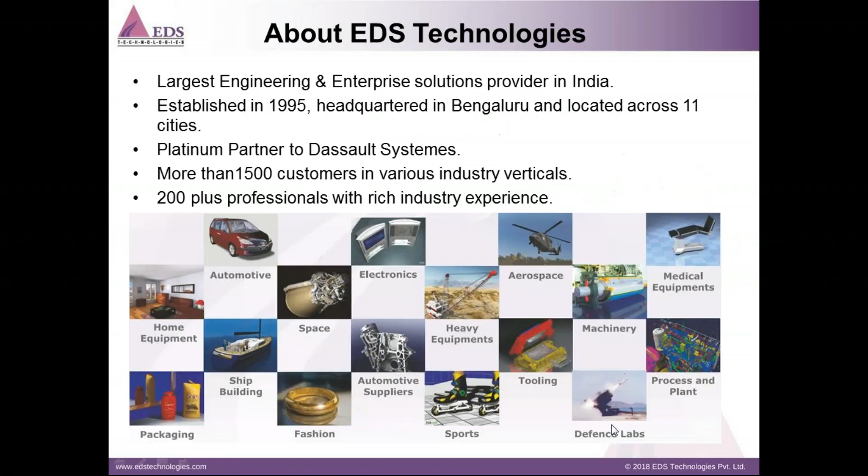Thank you, Ajay, and thank you all for joining this webinar on Simulation Powers Sustainable Innovation. In today's market, it's a brand dedicated to making realistic simulation an integral business practice: explore, discover, understand, improve. These are some of the buzzwords we hear in order to sustain in the competitive market, and to bring our product to the next assembly level or to the market. This helps us increase profit by reducing man-hours, machine-hours, method, time, and money. So in this session, let us understand the different tools available from Dassault Systemes to help our product design and development in a much faster and effective way.

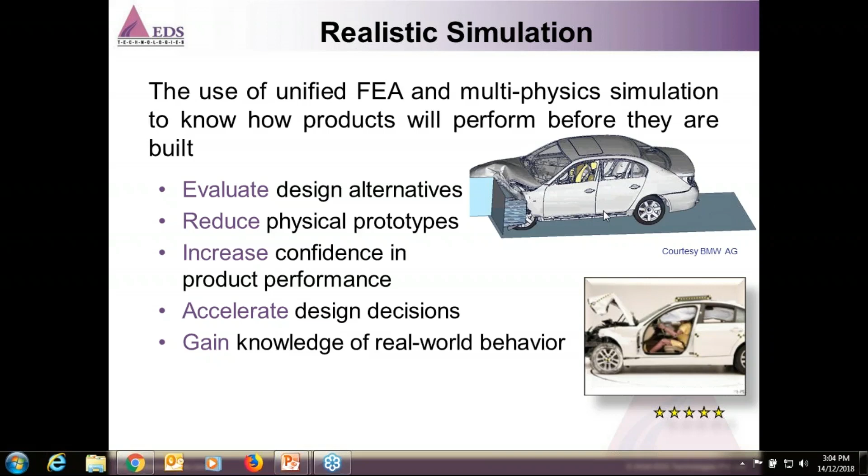Here you have an image showing physical testing, along with the real-time experimental image showing simulation on the right-hand side, and the practical testing image on the left-hand side, which will provide a similar result. So instead of putting your energy, money, and information into testing right from the first time, you can depend on realistic simulation to get the result.

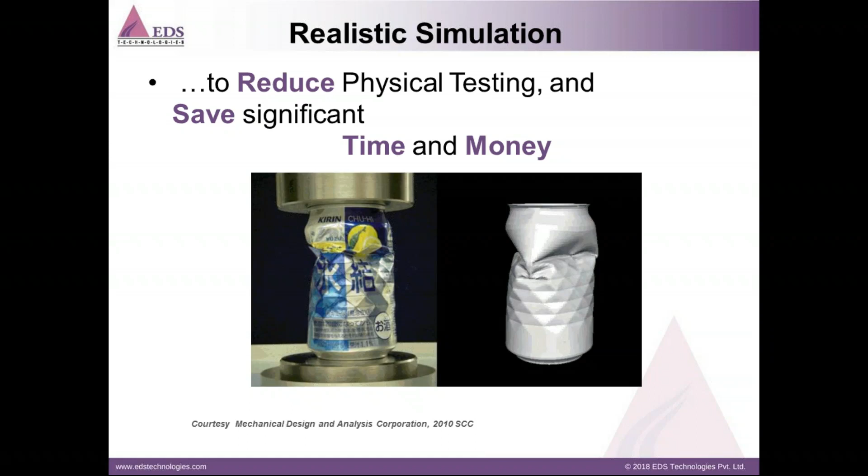So when we understand the SIMULIA product, Dassault Systemes has come out with 4 different products that we are going to understand today. One is for Unified FEA, the second for topology and other optimization, another for parametric optimization, and the fourth for fatigue and durability analysis. Similarly, it helps us with ease of use, complementary technology access, flexibility, scalability, openness, manageability, IT benefits, collaboration, and automation using these tools, which is also called the power of portfolio business values.

When we discuss Unified FEA, topology optimization, and other tools, there are tool names that are more prominent and used, tested by industry leaders, with results correlated to experimental results. Today I'm going to explain Abaqus Unified FEA, Isight, which is process automation and design optimization, Tosca, which is non-parametric optimization, and fe-safe for fatigue and durability analysis.

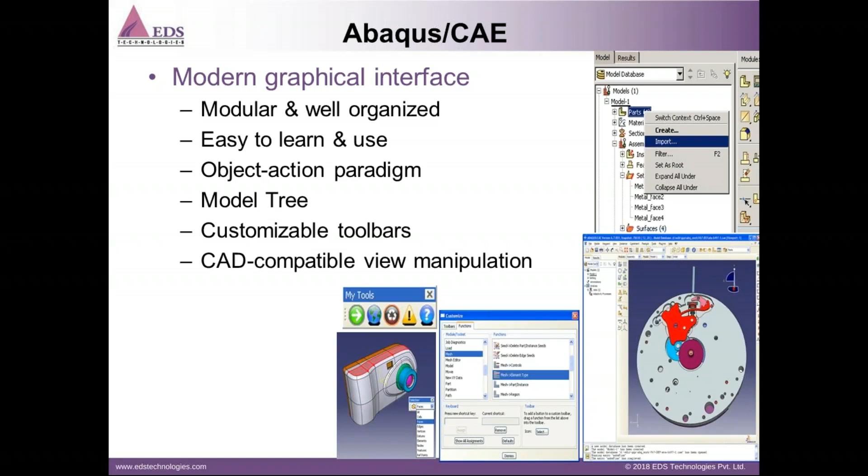Let's understand this particular tool, Abaqus Unified FEA. This model is having CAE, which is called Complete Abaqus Environment, used for pre and post processing, whether it is for modular or well organized structure, or which is very easy to learn, an object action paradigm, and a well-built model tree which helps us in modifying and editing values, whether for boundary conditions, loads, or certain models. So these things can be done with pre-processing using Abaqus CAE.

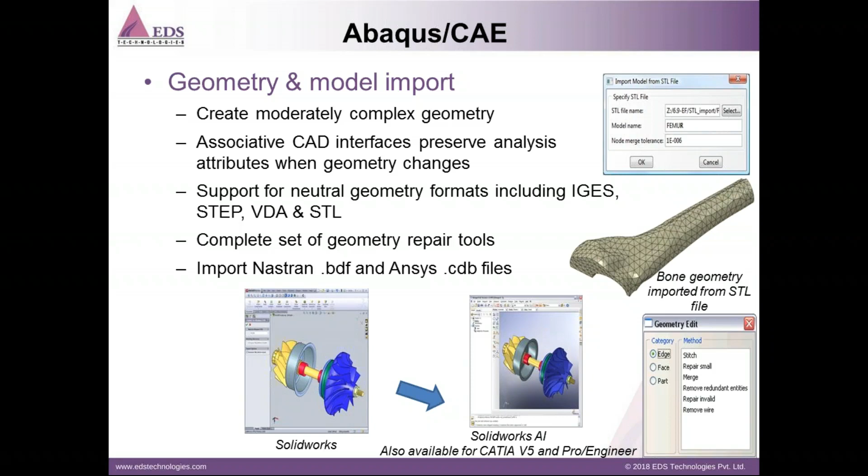And then we have a tool which helps us in importing the CAD model, whether in neutral formats like STEP, IGES, VDA, STL, or with add-on associative interfaces. We can import the CAD model from the respective CAD tool, and in certain cases it is bidirectional, while certain CAD associative interfaces are unidirectional. Apart from that, it has the capacity to import Nastran and ANSYS input files to further analyze in Abaqus.

Coming to the next module, here it is the meshing module which is inbuilt in Abaqus, where we can do fast automatic free meshing, manual meshing, or semi-automatic hex meshing. In this module, when the model is being used for meshing, it provides three different color conditions, whether it is orange, yellow, or green. If it is in orange, we need to partition it and use it for further mesh purposes.

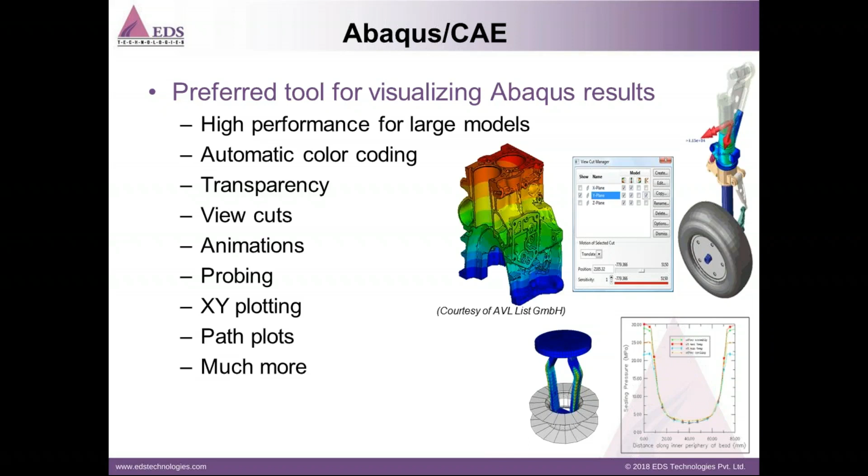Again, the same CAE is being used for visualizing the results, whether it is in the form of high performance large models, automatic color codes, transparency, view cuts, animation, probing, XY plots, path plots, etc.

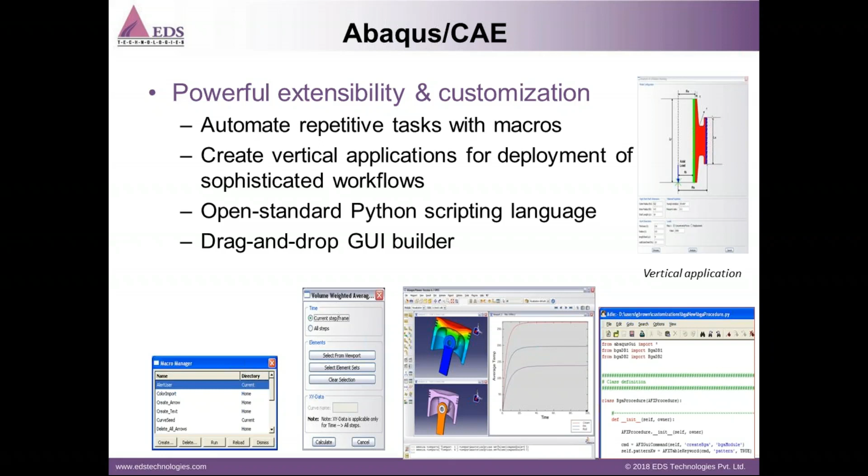Macros can also be written here in Abaqus using Python scripting, where if you are using the model for repeated application with only minor changes needed, you can definitely write a Python script. But having said that, to use Abaqus CAE, learning Python script is not mandated.

Coming to the solvers, we have two solvers in this. One is Abaqus Standard, which is based on implicit solution techniques for linear and nonlinear behavior. Similarly, it is being used for static stress and displacement, dynamic analysis, mode-based linear dynamics, heat transfer, coupled field analysis, acoustics, and etc. The second tool is Abaqus Explicit as far as solvers are concerned.

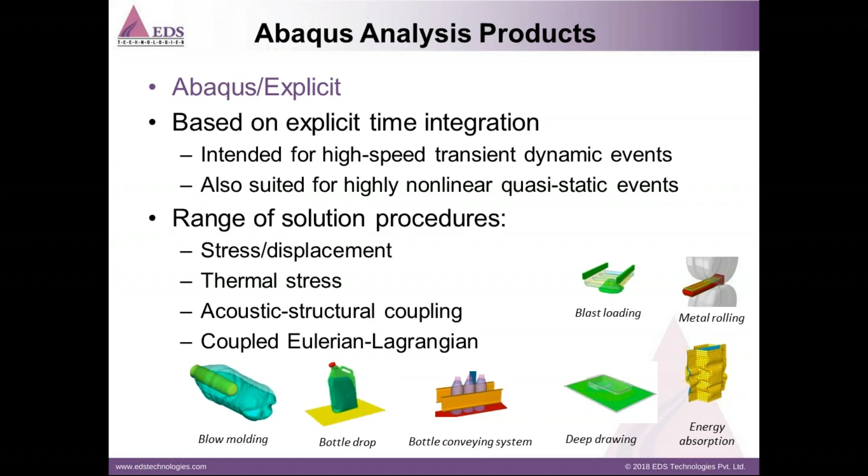Here it is being used for explicit time integration, intended for high speed and transient dynamic events. Also, it covers a range of solution procedures in terms of stress displacement, thermal, acoustic, structural, and coupled Eulerian Lagrangian analysis, apart from blast analysis, drop test analysis, or deep drawing analysis, etc.

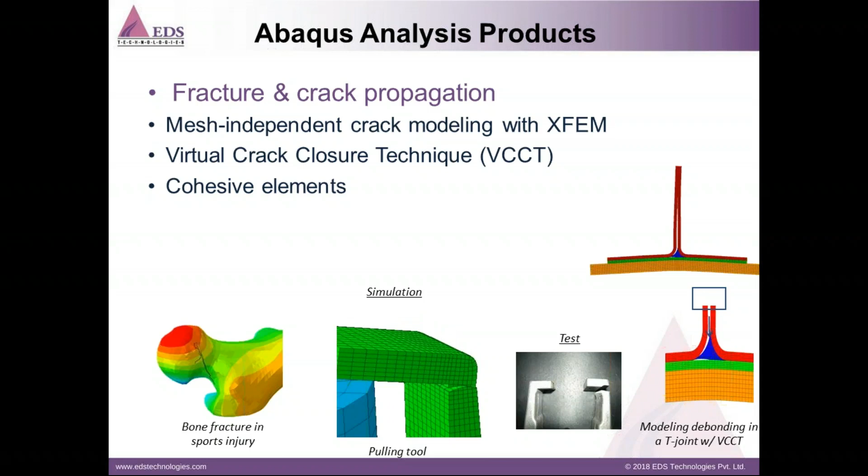Abaqus has a feature which helps us in understanding the extended finite element method to understand crack initiation and propagation. So we have cohesive element technique as well as virtual crack closure technique in this arena.

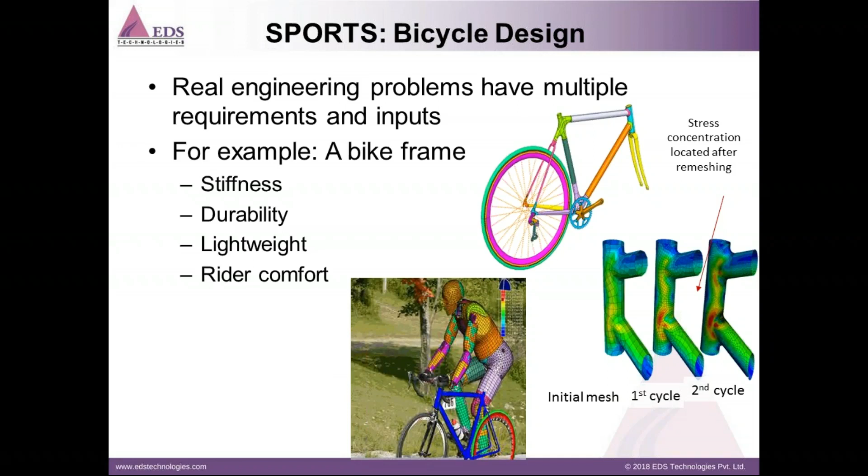It's a real engineering problem that can be solved using this Abaqus Unified FEA, and we can get different results as we do modifications in terms of mesh, which is called mesh convergence. It is also being used by industrial leaders, tier 1 and tier 2 suppliers, to get results which can be correlated and validated with respect to hand calculations or experimental tests.

A summary which says about Abaqus as a unified FEA: Standard and Explicit can be used in this. Co-simulation with Standard and Explicit can be done. Pre and post processing using an easy tool called CAE. A generalized contact facility is available, and so on.

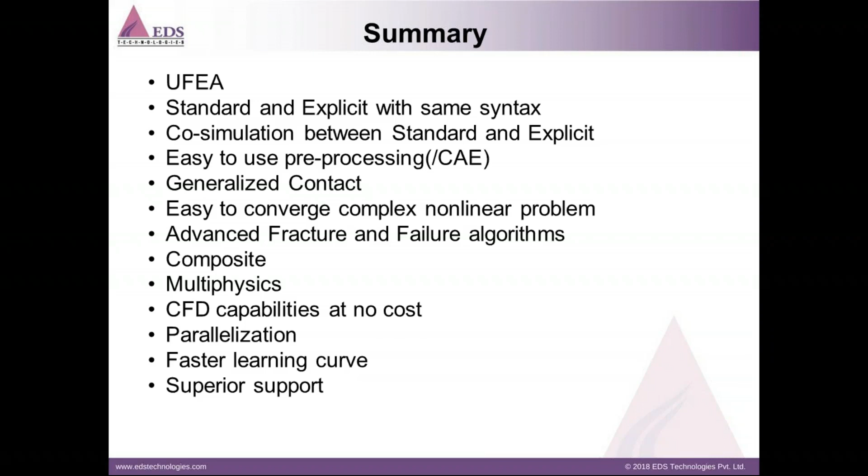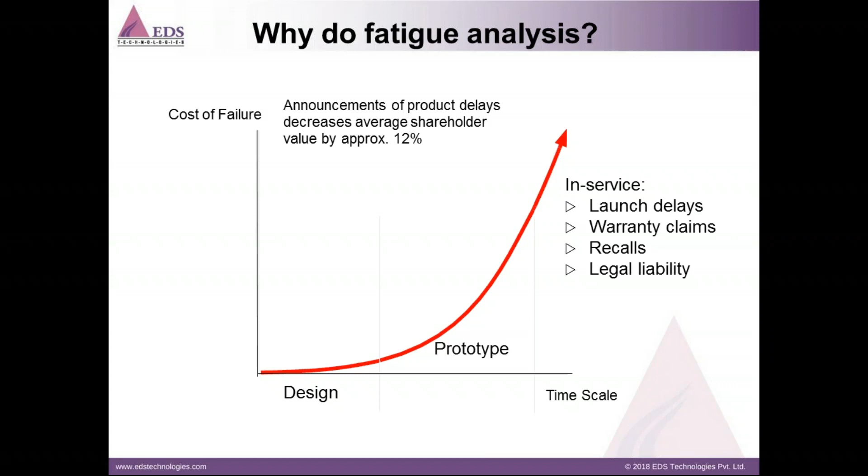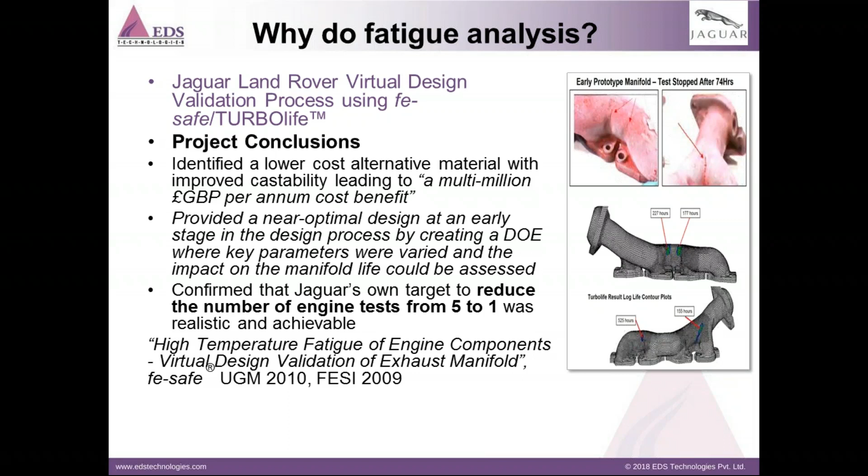Here is one example on the Land Rover from Jaguar. There was a problem in terms of using this product, and later covering that using FE-Safe Turbo Life, the lower cost alternative material with improved castability, which led to multi-million pound per annum cost benefits. It also reduced the failure and the number of engine tests from 5 to 1 in realistic terms, and it was achievable.

So what will make us use this particular fatigue analysis? Before going to that, let us understand how this works. In any industry, we can find the design, and there will be designers. This design will be used by engineers to do the finite element analysis. Once it is done, we will be having the ODB results. Once this result is taken as an input for FE-Safe fatigue tool, we can also take the road load data and material properties.

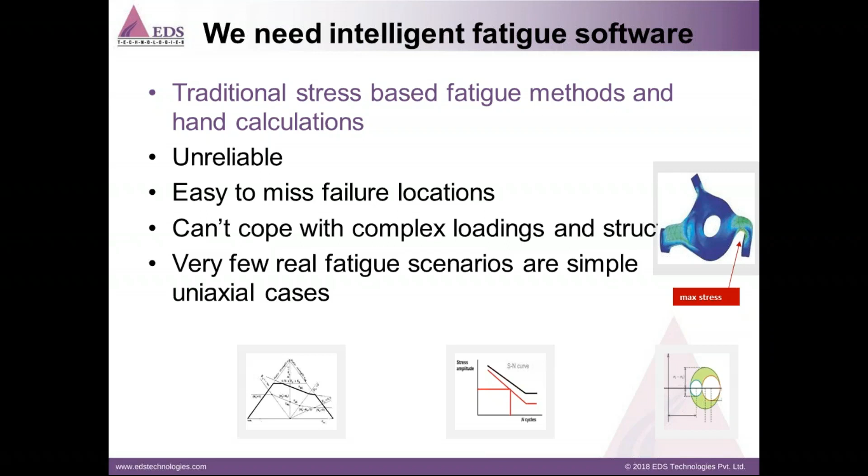So in general, usually organizations will depend on their traditional method in order to find out exactly where the failures are, and in the spreadsheet there is a possibility of missing certain locations or nodes where the crack might have happened. So it is also very difficult to understand and find out the problem or initiation of the crack on the spreadsheet in complex loading conditions and structures.

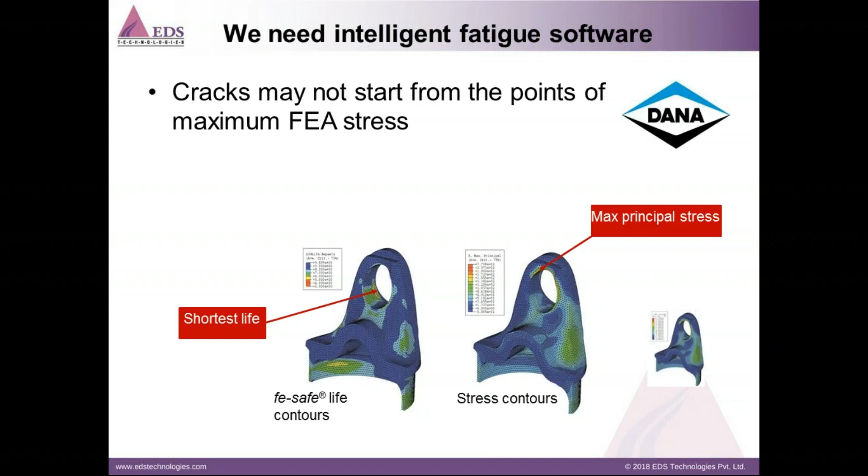So what we can do in that scenario is, there is always a thinking that whichever the maximum stress region is, will be the shortest life region, but in actual scenario it is not the same. The maximum stress location may be different, and the shortest life or initiation place may be different. So to understand this, we have an example from Hyundai which explains.

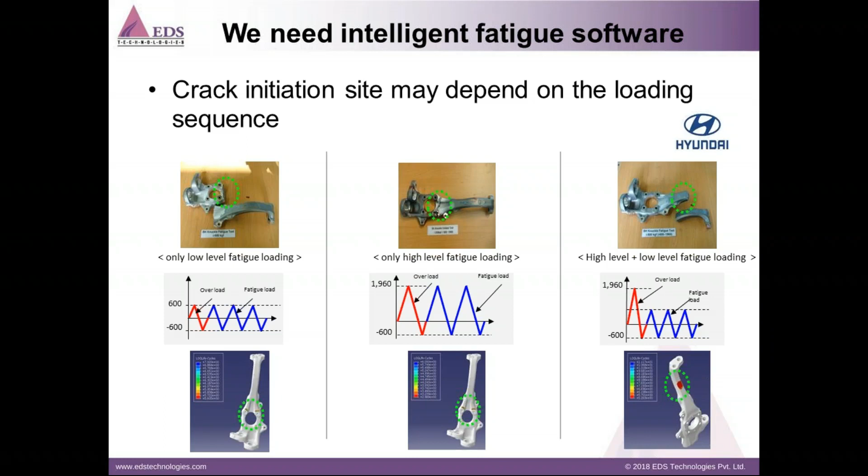When we use high cycle fatigue, in that case also it's a uniform high cycle fatigue. You can see the crack initiation at one particular location, which is near to the notch, and both results resemble each other. In the third picture, it is a combination of both high and low cycles. You can see the crack initiation at one particular location away from the notch in the FE-Safe result, and you can see the same location, and the crack has happened at the same location in the experimental setup also. So it also depends on loading sequences, not only the high stress or maximum stress location.

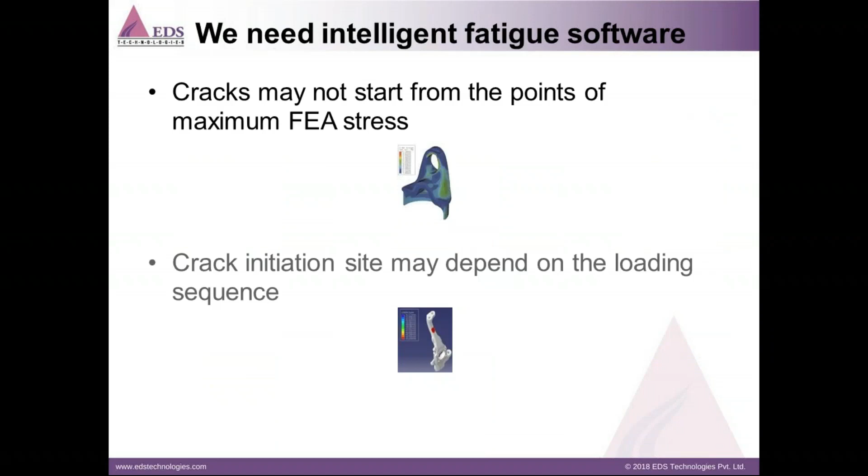Apart from that, manufacturing effects also need to be taken into account. With this, using FE-Safe, you can optimize the design for minimum weight or cost, and save time and money with right first time prototype testing. Evaluate different material options, design and validate fatigue test programs, and reduce product recall and warranty costs.

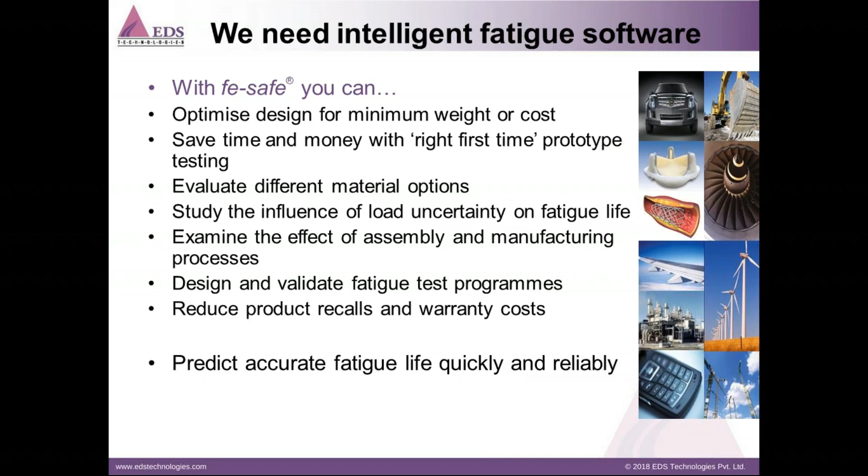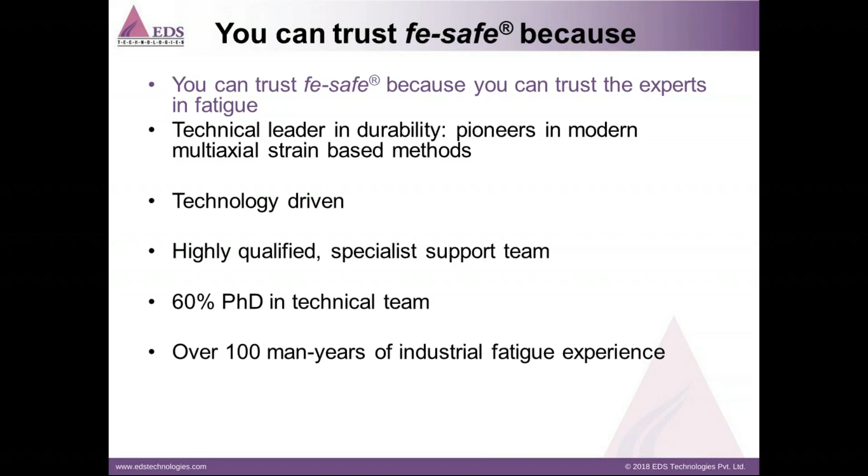With base FE-Safe, we have certain other modules which include thermo-mechanical fatigue (TMF), creep fatigue for turbo life, and fatigue of elastomers using FE-Safe Rubber, and also fatigue of weld joints using Verity. Some capabilities in the standard version of FE-Safe include stress life, strain life, infinite life, and fatigue of cast irons, and also fatigue related welds using BS 5400 and 7608, etc.

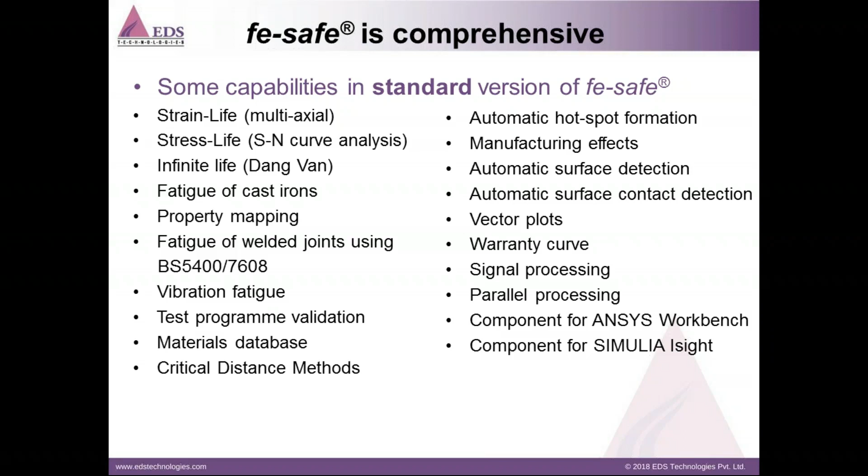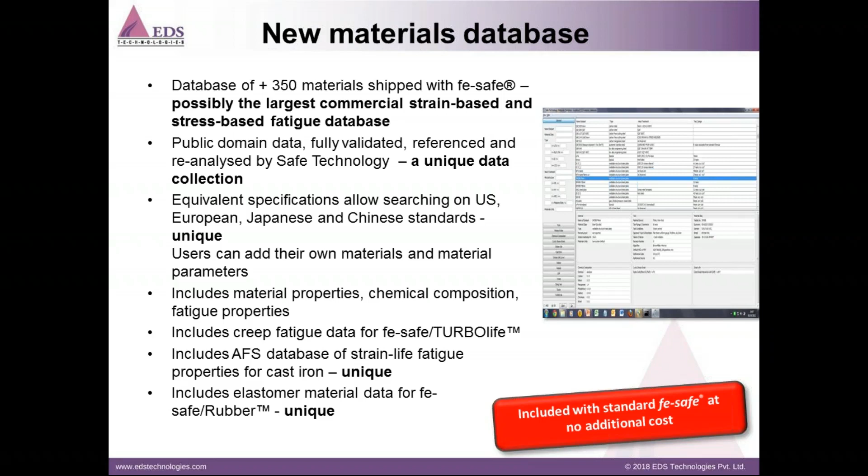It also has a capability to have more than 350 materials included, which can be used with material properties, chemical compositions, and fatigue properties, etc., along with FE-safe.

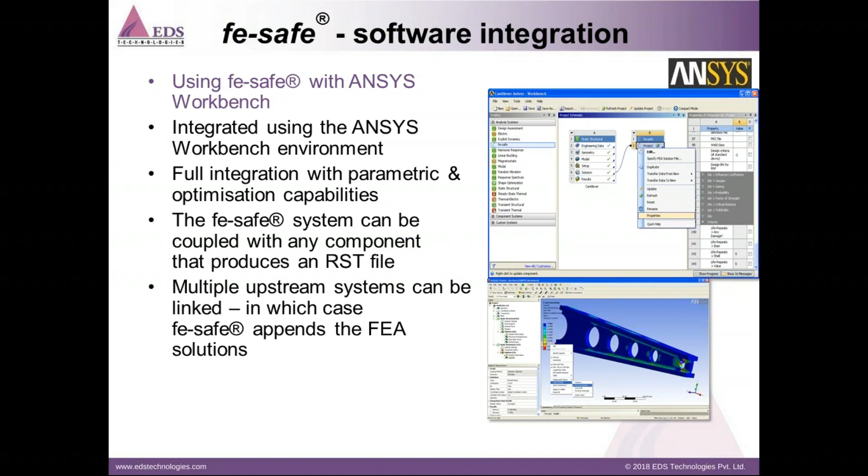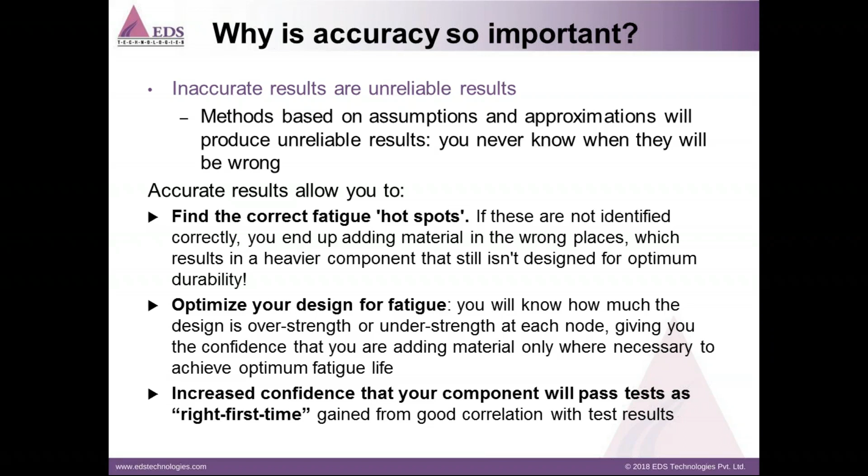And also this particular product is fast, it speeds up the analysis with the said hardware. We can go ahead and get the results at a faster rate.

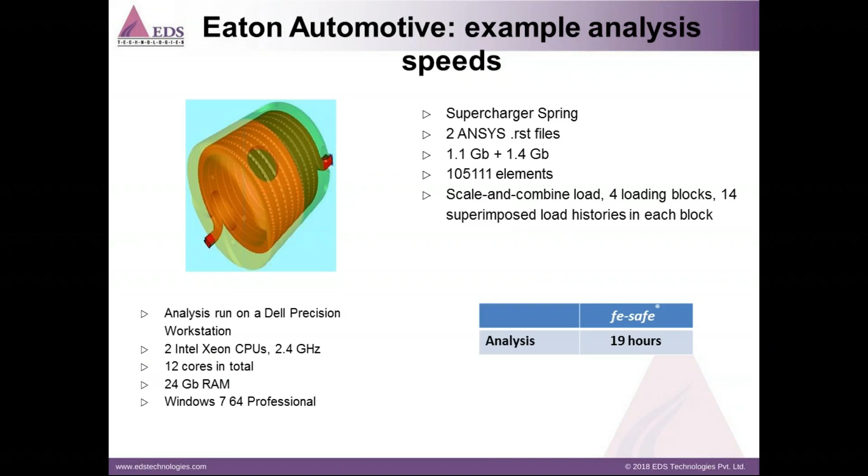There is no trade-off between speed and accuracy. The unique nodal elimination method in FE-safe ensures that you get your result quickly and correctly, regardless of the complexity of the analysis. Parallel processing is automatic, and distributed processing is also available.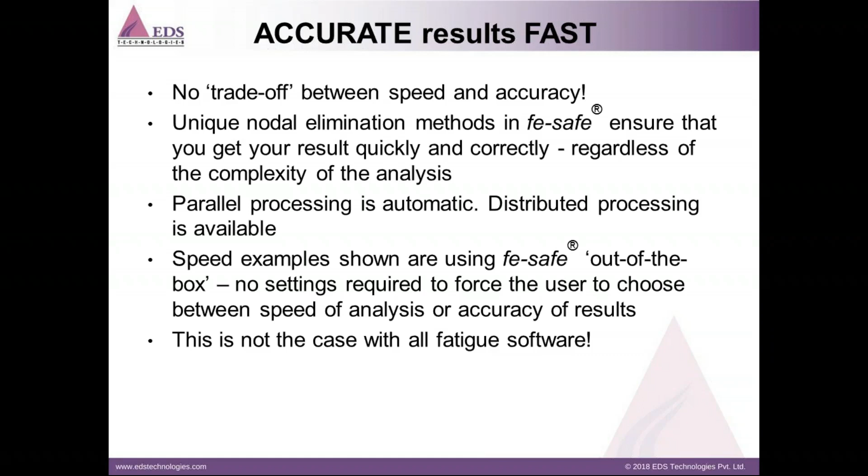The speed examples shown are using FE-safe out of the box, no setting required to force the user to choose between the speed of analysis or accuracy of the result.

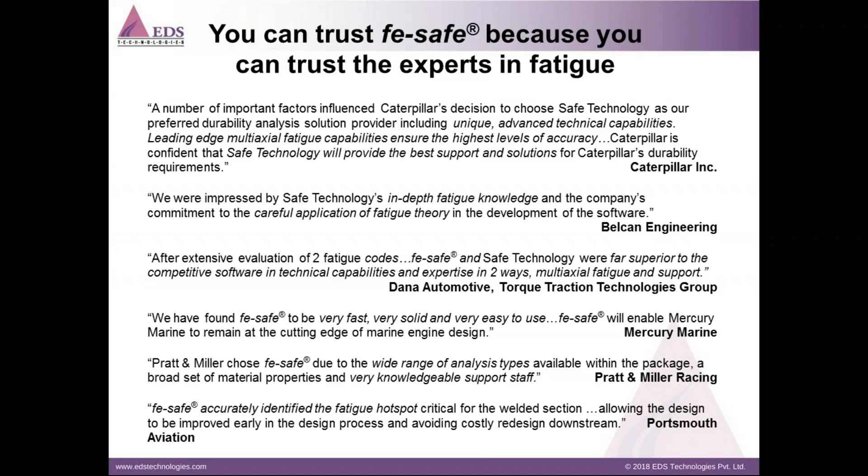There are some references from industrial leaders like Caterpillar, Belcan, Dana Automotive, Pratt & Miller, and also the association of FE-safe with certain other existing products, so that the input and output can be taken into FE-safe seamlessly to get the fatigue and durability life of the products.

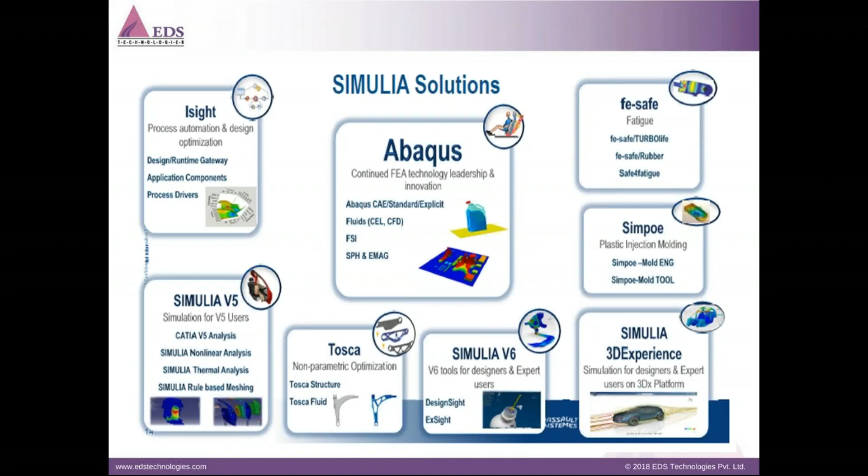To discuss the next product, that is Tosca, a non-parametric optimization product, in order to reduce the weight and increase the stiffness, also to remove material from the strongest point and add material to the weaker point in order to make the model sustainable and to complete its operation under operational loading conditions.

Two sets of information are available on the screen: one is the non-parametric method, another is the parametric method. Here we will discuss the non-parametric method currently, and later we'll discuss the parametric methods.

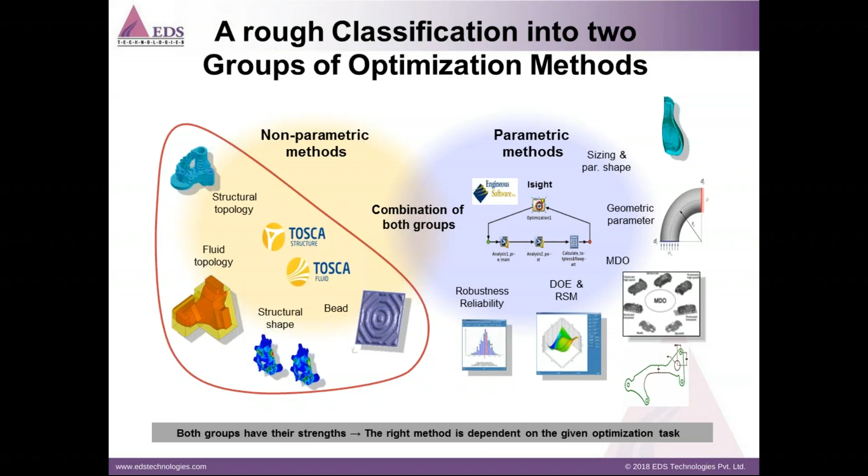There are four important aspects in Tosca structure. The first is topology optimization, in order to maximize the stiffness or minimize the weight, which is used in innovative designs.

There is another product called Tosca Structure Sizing, which is for reducing mass through optimized sheet thickness. Third is shape optimization, which reduces local stresses and increases durability. Fourth is bead optimization, used for increasing the stiffness or eigenfrequency of the sheet metal structure, which can be used to accelerate product development.

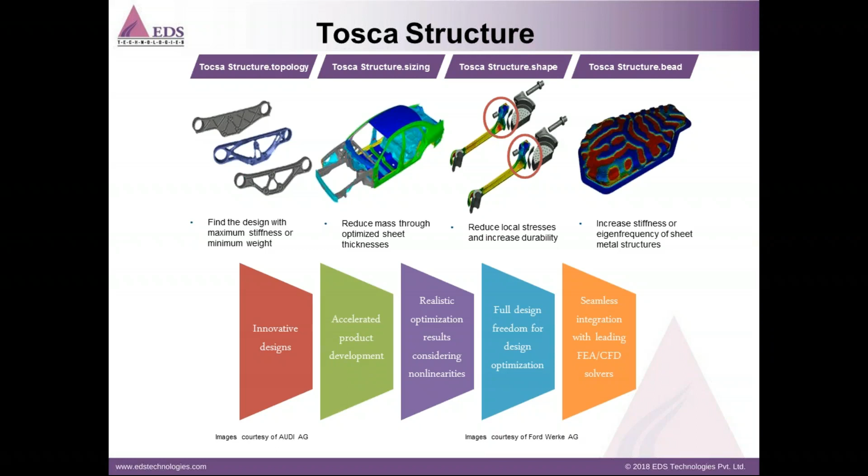A realistic optimization results by considering the non-linearities in the picture, full design freedom for design optimization, and seamless integration with leading FEA and CFD solvers.

Usually industries will have a CAD, FE, and the prototype and experimental result. Having said that, when the product is being developed, designed, and analyzed, a prototype will be made so that it can be tested and sustained in the market based on the operation loads and also cost-wise and material-wise.

But having said that, there is an issue: usually the industrialist will sign an agreement much before the product launch, saying that for 3 years or 5 years of a pre-described time slot, they are not going to increase the price of the raw material, even though there is fluctuation in the raw material market worldwide. This always creates difficulty, and the industrialist or manufacturing sectors will be under high pressure to cope with the cost and also to be more sustainable in the market.

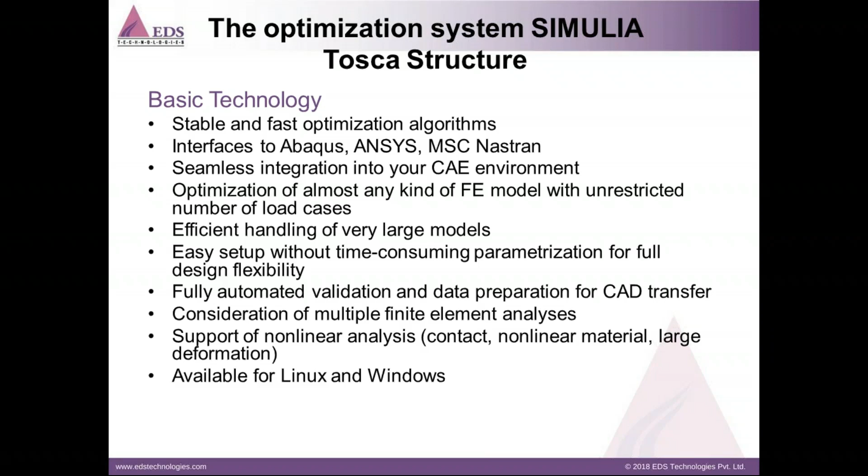So here we have a Tosca Structure product, which is a stable and fast optimization algorithm that has an interface to Abaqus, ANSYS and MSC Nastran, offering seamless integration into your CAE environment. It can be used on both Linux and Windows, and it supports all three non-linearities, whether contact, material, or geometric non-linearity.

Here we have a procedure with an example. We can see the initial design space where the finite element method is applied, and there are two regions where constraints and loading conditions exist. These are frozen regions which cannot be further used. The rest of the region can be used as a design space to further reduce material wherever it is a stronger point, and wherever it is weak, material can be added.

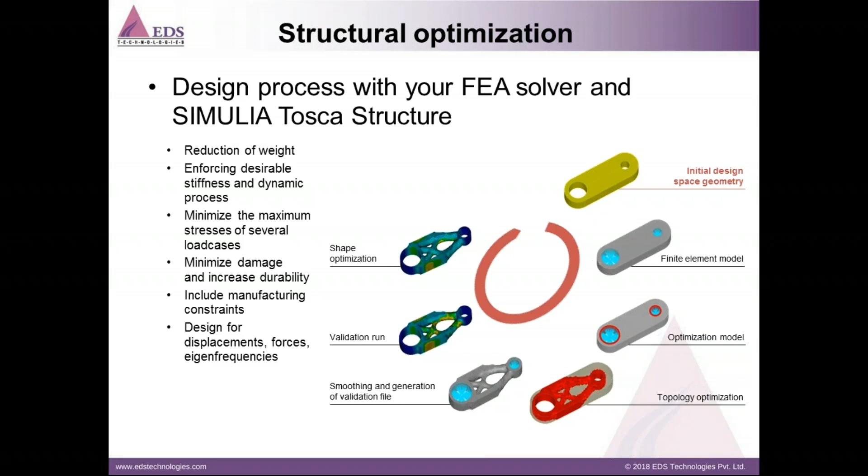Then the smoothing operation is done, which is taken into a validation CAE tool to validate, and shape optimization can be done. Later it can be taken back to CAD, a prototype can be made, testing can be done, and it can be used in the next manufacturing, assembly, or market stage.

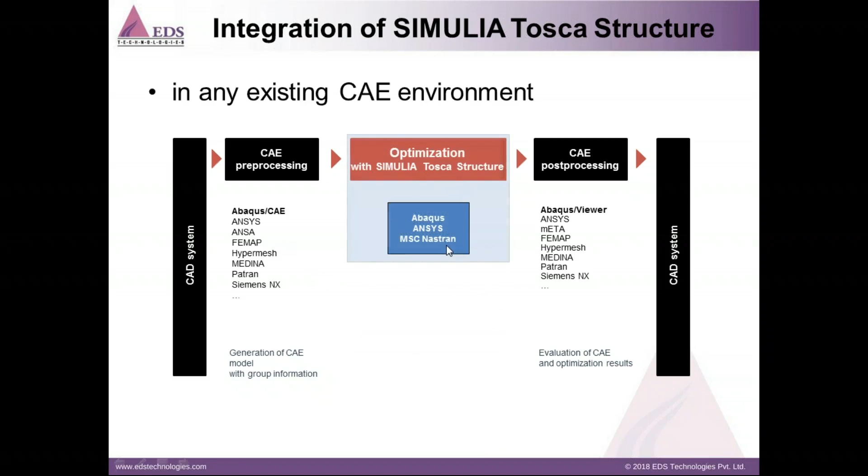We can also see the multi-objective min-max formulation for several objective functions, supporting both linear and non-linear analysis. There is automatic validation and data preparation for CAD transfer, along with 3D animation sequences, result plots, and sensitivity plots.

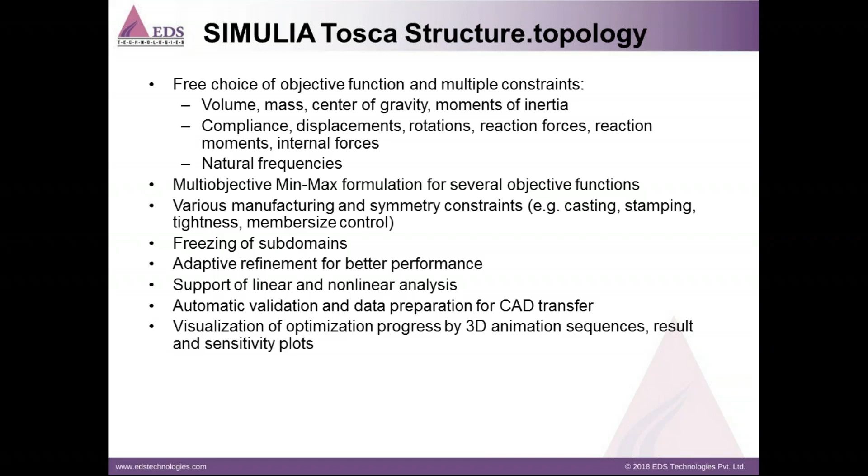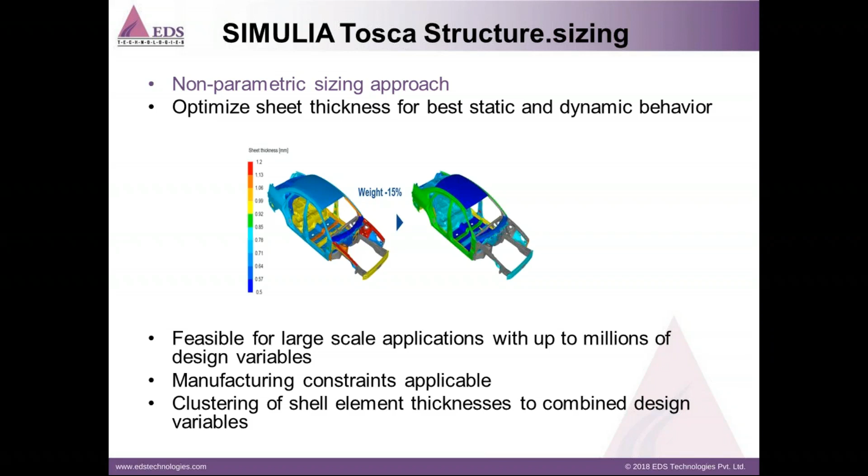There is a second module called sizing, which can be used for a non-parametric sizing optimization approach for large-scale applications with up to millions of design variables, and also for clustering shell element thicknesses to combine design variables.

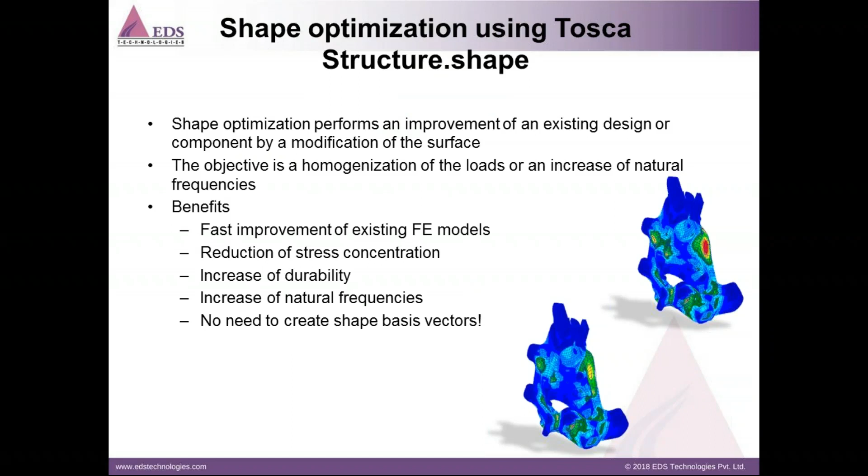We have shape optimization results showing fast improvements of existing FE models, reduction of stress concentration, increased durability, and increased natural frequency, with no need to create shape basis vectors.

This helps with volume constraints, unlimited number of load cases, and mesh-independent manufacturing constraints for casting, forging, stamping, extrusion, and drilling, minimum and maximum size limits, penetration checks to neighboring parts, and maintaining mesh quality during each design cycle of the optimization.

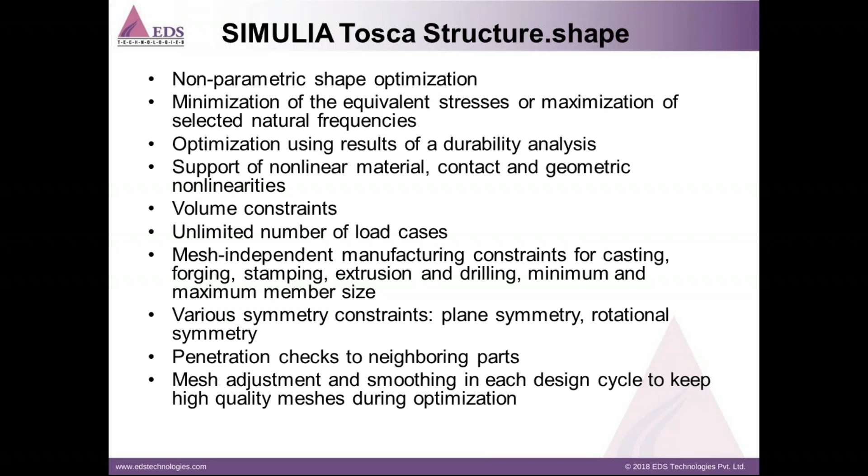We have a fourth module called bead optimization, which helps determine the optimum location and orientation of beads in sheet metal structures. It also saves time with automatic bead calculations needing only 2 to 3 solver iterations, helping produce a clear bead layout for complex models with innovative direct producible beads.

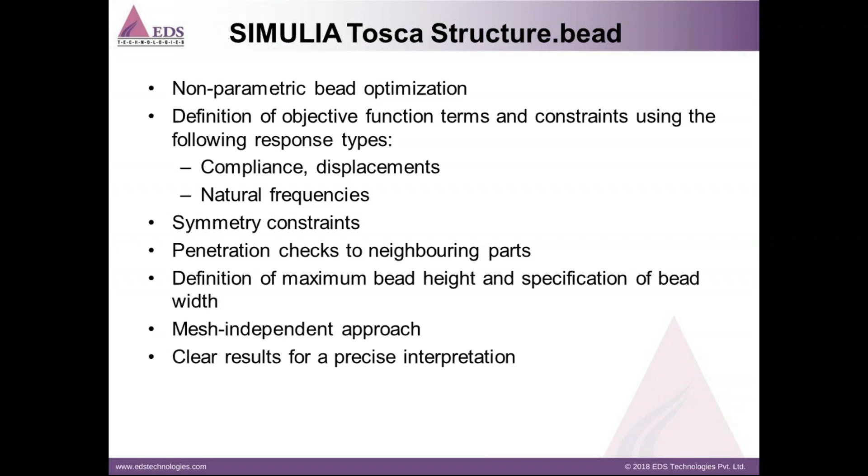This considers manufacturing restrictions during optimization, helping with compliance and displacement, natural frequencies, symmetry constraints, a mesh-independent approach, and clear results for precise interpretation.

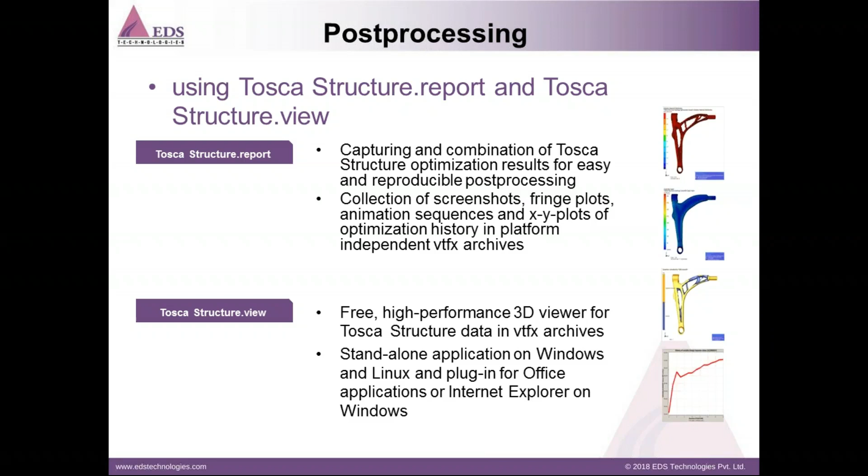Tosca also has features to view results and produce reports in the form of VTFX formats, 3D viewers of the models, as well as 3D animation plots.

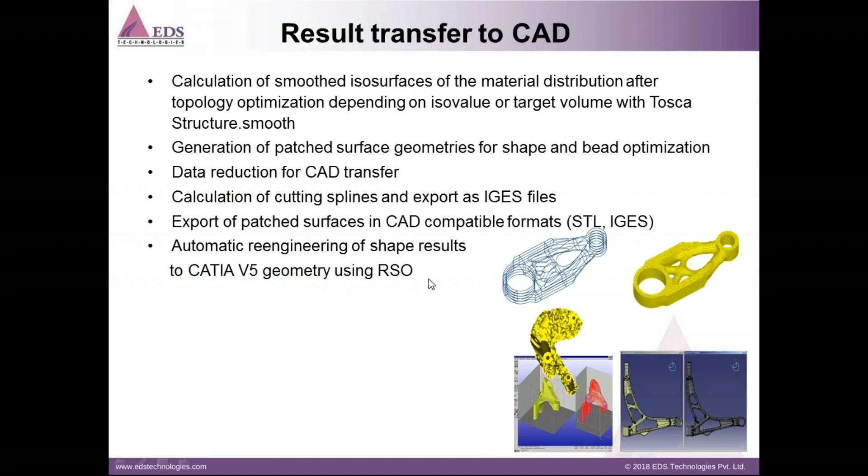Here is the procedure of smoothing and generating validation inputs, with STL and IGES CAD compatibility formats available, as well as CATIA V5 geometry using RSO. You can re-engineer the shape results.

In terms of technology, integration and performance, Tosca can be a leader in optimization technologies through customer-focused development and joint strategic research projects.

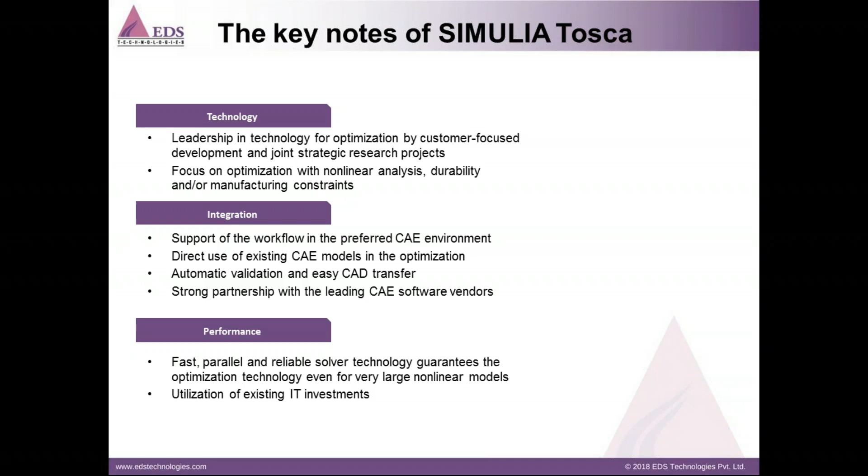The fourth tool incorporated in SIMULIA is Isight, which is a parametric optimization tool used in analysis where industry will use a third-party CAD or CAE tool, as well as inbuilt programs like C, C++, Java code, or Python scripting.

As well as their own testing rigs and experimental setups, so in order to take this data from multiple different clusters and apply technology including topology techniques like DOE studies or optimization to get the optimized result, we have to make use of all these applications to standardize and reduce the difficulties.

So businesses cannot consider enough design alternatives in the time available for product development. This can be addressed by using Isight, a parametric optimization tool, in their day-to-day analysis.

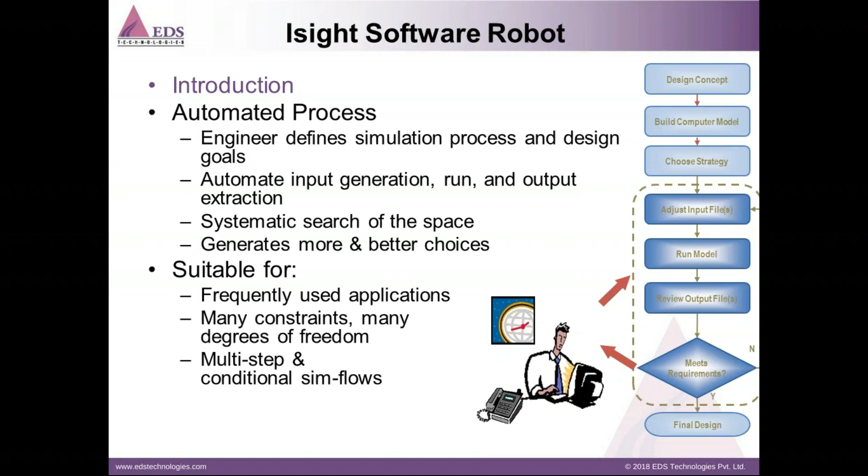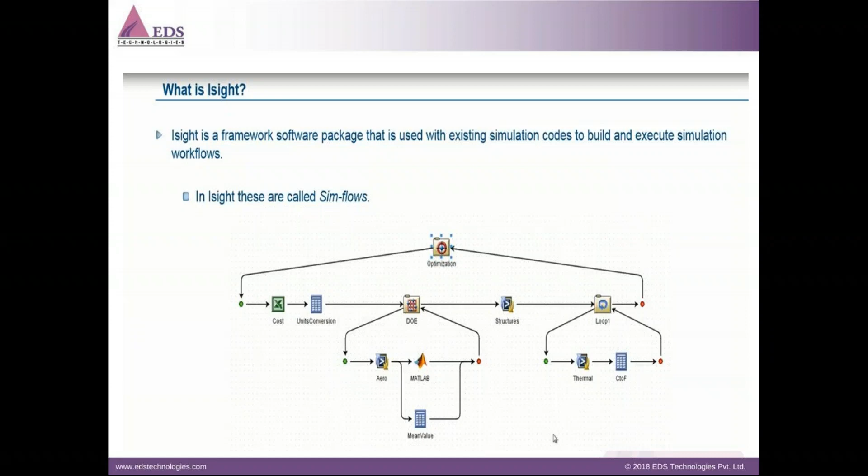Isight is a framework software package used with existing simulation codes to build and execute simulation workflows. It has a coat hanger-like structure using multiple techniques such as DOE, optimization, Topology, and Six Sigma. We can also use core and premium components like ANSYS or MATLAB, as well as calculators, Excel sheets, or in-house scripts to get results.

The benefits of using Isight include reducing design time, improving quality, and better understanding our designs.

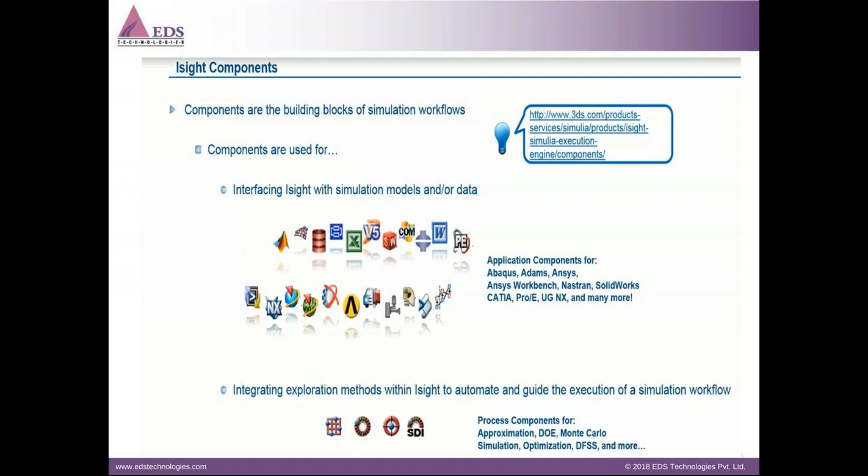We have process components or application components which include approximation, DOE, Monte Carlo, optimization, Six Sigma, etc. If Abaqus needs to be incorporated, there is a process that uses the inputs, outputs, and the batch file of Abaqus to find results based on the DOE studies.

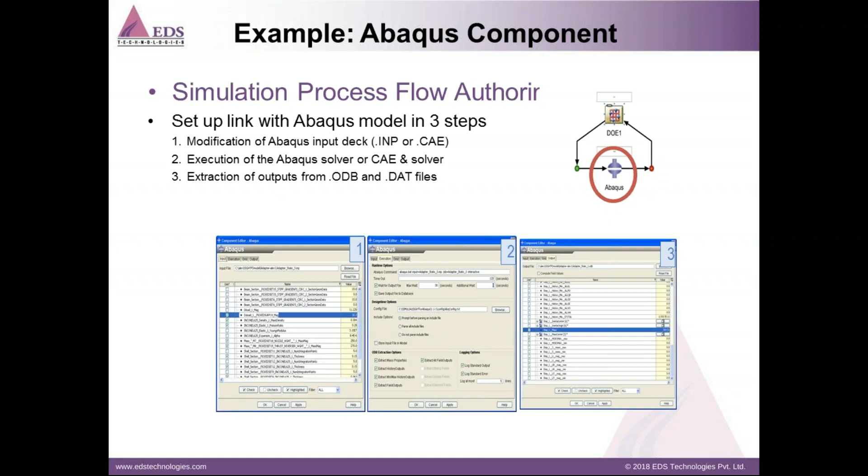A simulation process flow enables automatic data exchange with CAD, automatic data exchange with Abaqus input files, ODB files, and executable files, so that we get the required results. A SimFlow or Simcode is a tool used to find results, wherein we have certain inputs and certain outputs.

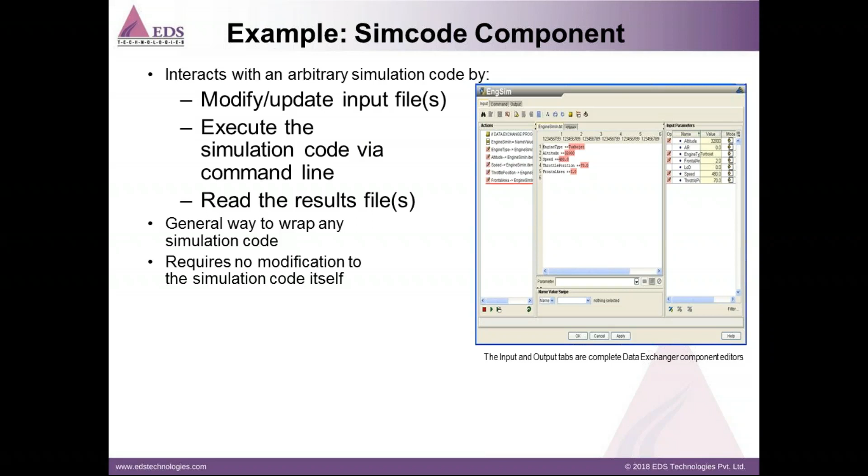We need to map and get the best result out of that. We have a process flow authoring simulation wherein parameters are mapped using different inputs and outputs to get the required results.

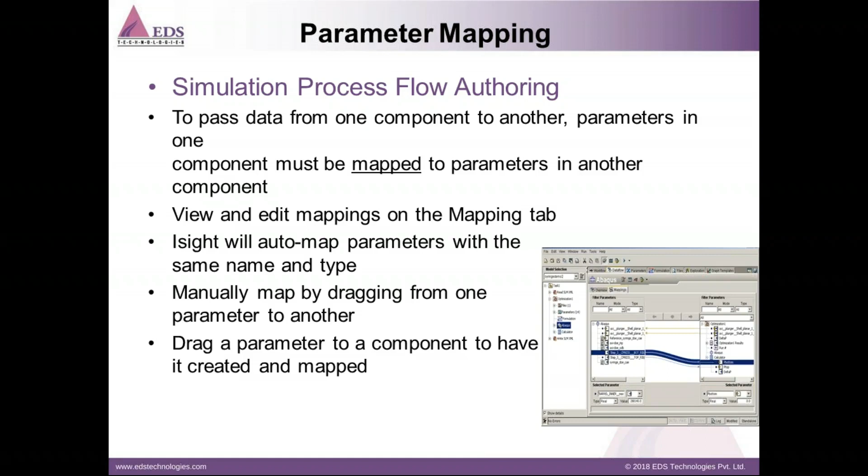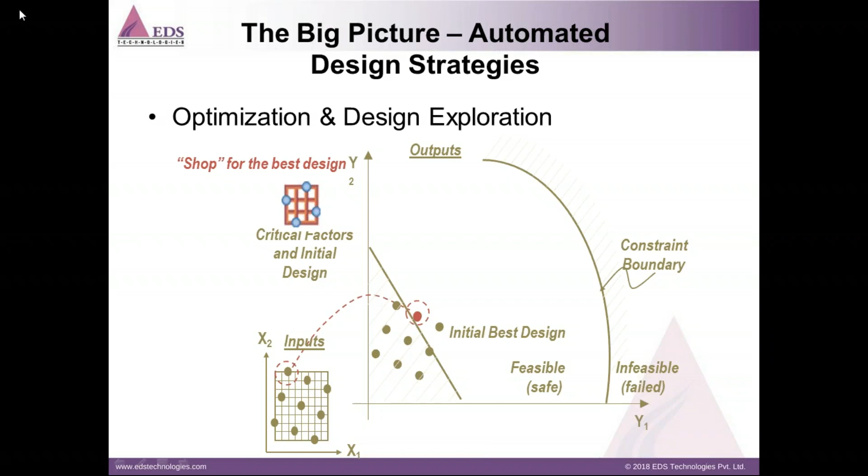Here we have an optimization DOE study that performs trade-off analysis and helps understand design space capabilities, determining which input variable has the most influence on the simulation output. Parallel execution is also used to build approximate models and estimate the optimal design.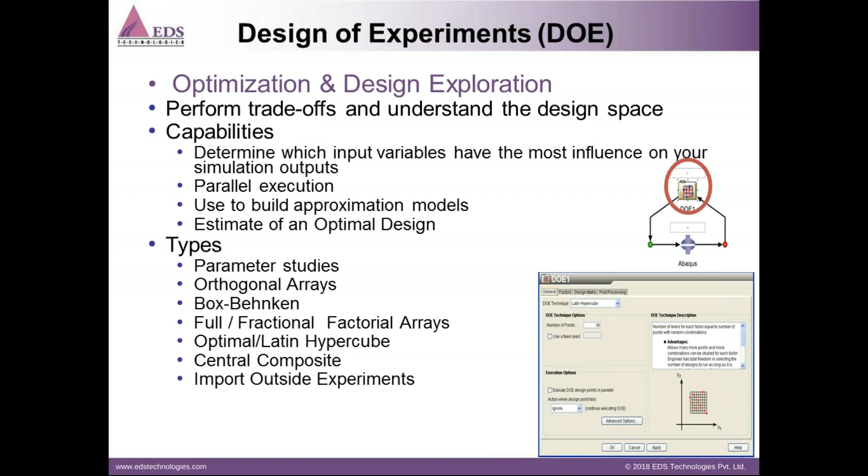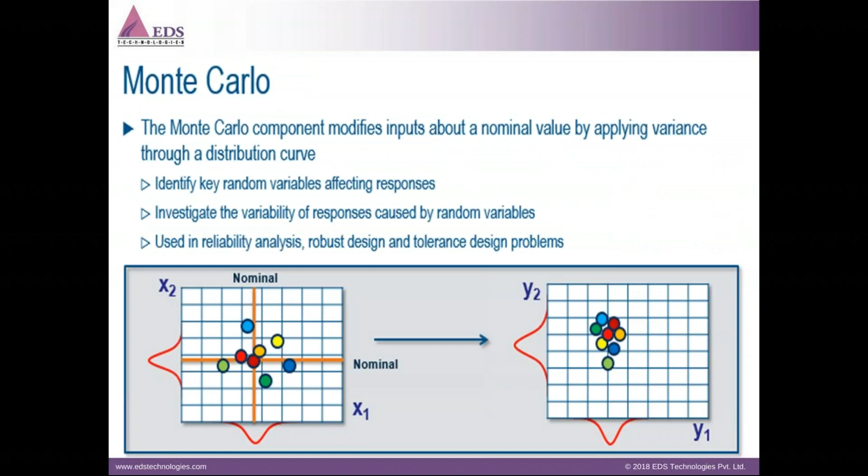An approximation tool is available, which is a mathematical model that approximates the relationship between the set of inputs and outputs. We also have Monte Carlo, which modifies the inputs around nominal values by applying variances through distribution curves.

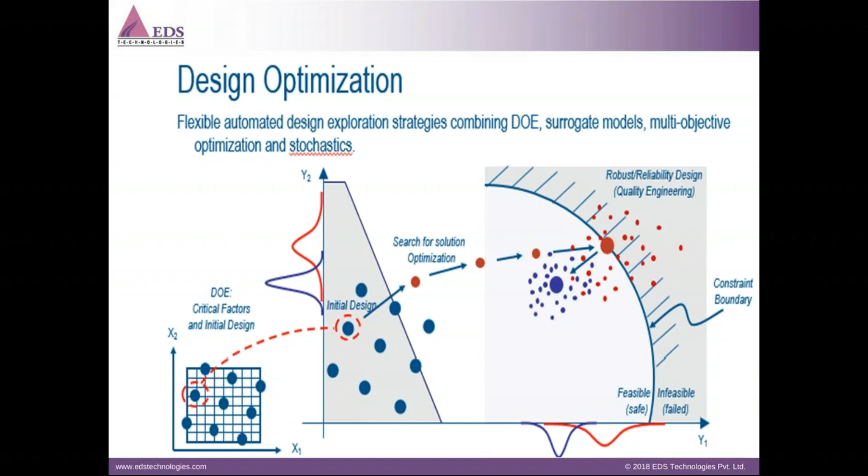We have design optimization, where a DOE study is done, and for different iterations we find the best result, which can be taken further to identify the optimized result.

We can also run Six Sigma analysis to find the reliable and most feasible, robust design. This can also be used to check probability of failure, mean, and reliability using this particular tool.

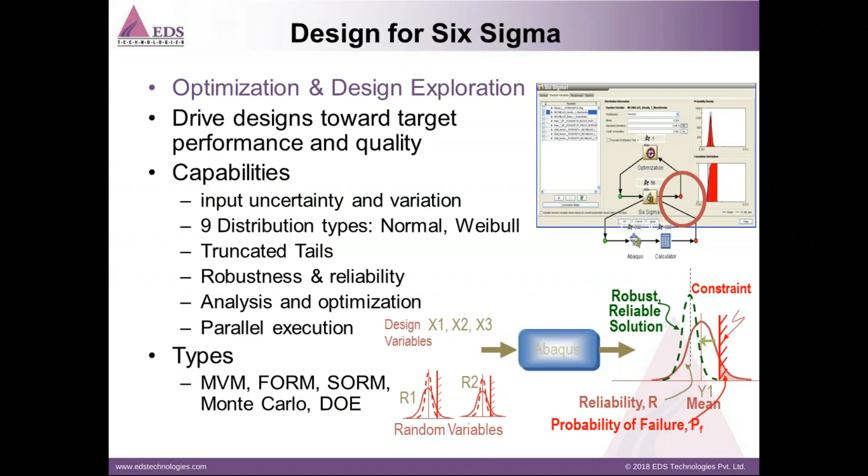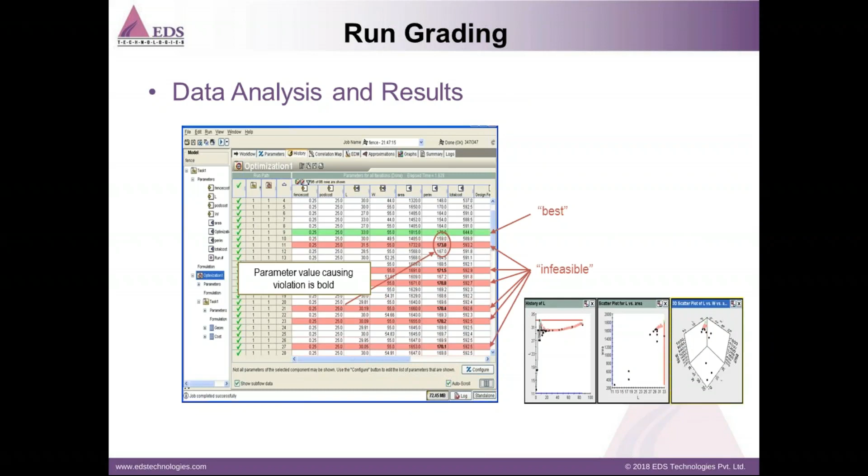Here is an example showing the optimized result with captured data, where green indicates the best result and red indicates infeasible results.

The results can be plotted in 1D, 2D, and 3D plots, and visualized in real-time plots. Data mining is also possible.

There are worldwide users using the Isight tool across the world.

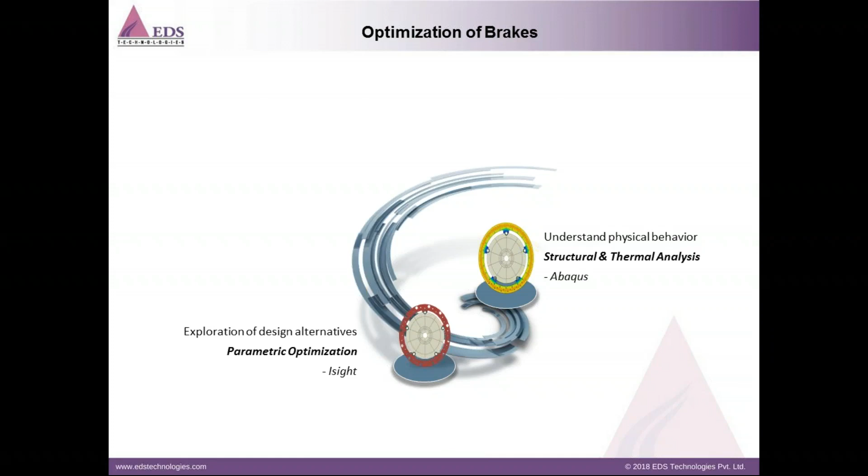Here is an example of brake optimization. Let's understand the physical behavior of a component that has structural and thermal analysis done using Abaqus. Then we perform parametric optimization and exploration of design alternatives in Isight. We also use topology optimization with Tosca structure for conceptual lightweight design, and shape optimization using Tosca structure to improve structural integrity.

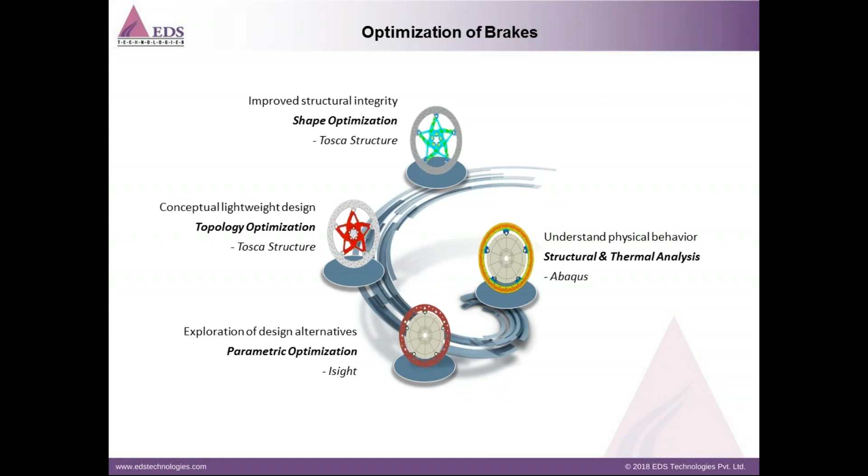First, let's understand the analysis done using the model. The friction-induced heat leads to brake fade. Because of this, wear and tear happens, noise occurs, and vibration issues arise. Uneven thermal bands on the disc lead to variation in thickness and brake torque, so a fully coupled thermal-mechanical analysis is required to analyze this.

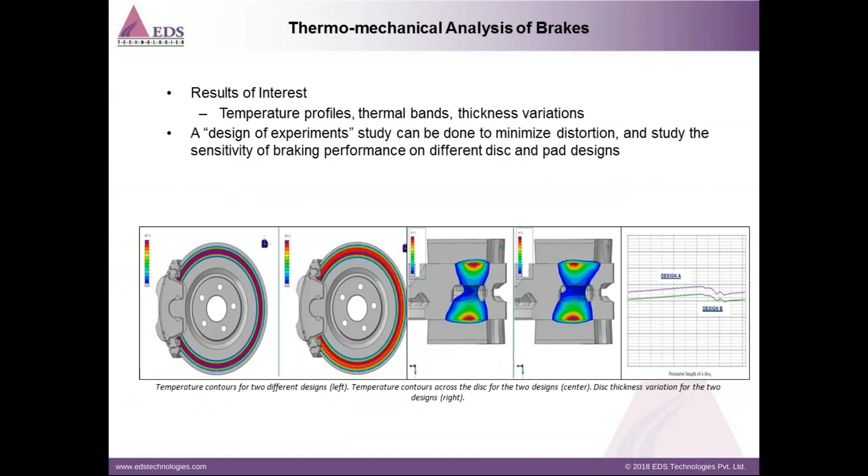Frictional induced heat may affect parameters such as the friction coefficient graph, and the analysis results are plotted. A design of experiment study can be done to minimize distortion and study the sensitivity of brake performance on different discs and pads.

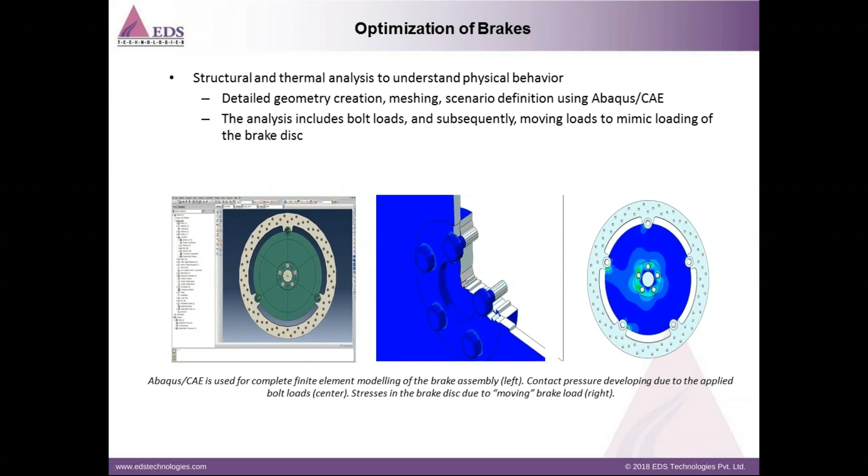So here we have an Abaqus result which shows the detailed geometric creation and meshing scenario defined in Abaqus/CAE, and also the analysis of bolt loads, subsequently moving the loads to mimic the loading of the brake discs.

So parametric optimization to explore design alternatives, which addresses how brake fade is caused by the accumulation of friction-induced heat due to excessive braking.

Vent holes are created for cooling, but should be designed without affecting the strength and performance of the component. So using Isight, the parametric optimization can be performed to maximize the cooling, with the brake area provided as a constraint of more than or equal to 95% of the disc surface.

So once the result is plotted, we have the optimized result. Vent hole radius of reference was 4.0 mm, optimum is 2.4 mm. Number of hole segments was 6 earlier, now it is 24.

Vent hole angle earlier was 8.0, 7.0 is optimum. And maximum nodal temperature was 286, and now it is 256 degrees, that is some 30 degrees reduction.

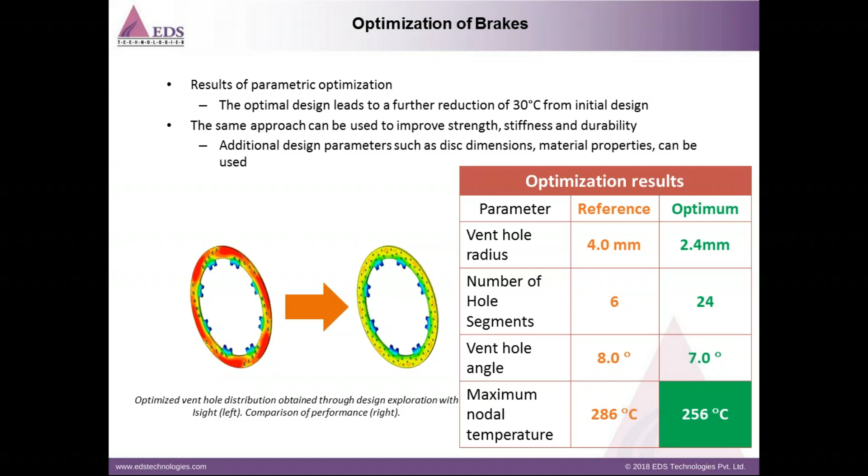So also the concept using the brake disc should be stiff to reduce distortion during braking, and reducing the weight of the disc can reduce the inertia and ease braking.

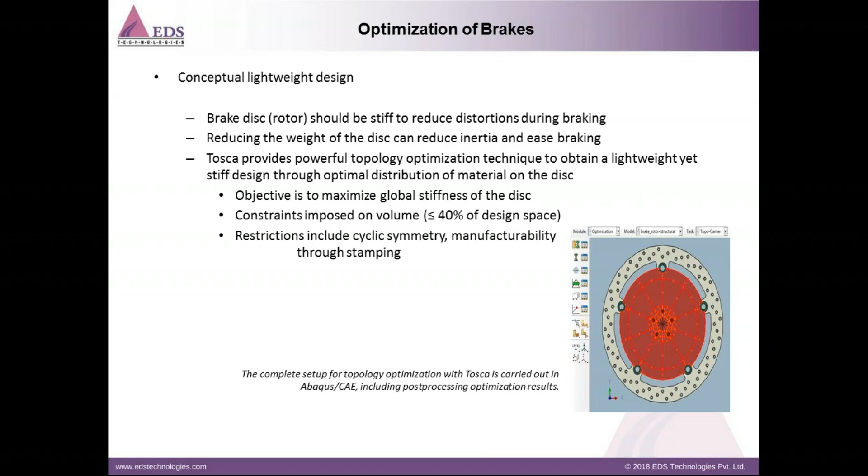Constraints imposed on volume were less than 40% of design space, and restrictions include cyclic symmetry and manufacturability through stamping. So we have the results from Tosca.

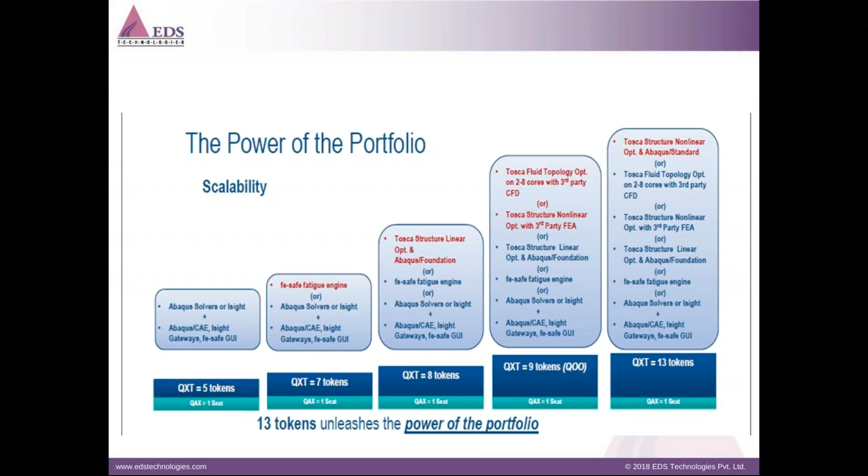So now this unified power, that is power of the portfolio - this extended tokens, the same set of extended tokens can be used to analyze whether it is Abaqus Unified FEA, Isight, fe-safe or Tosca on the same set of GUI, that is QAX, which can be used to do the pre-processing and post-processing in all four tools.

So using this is more economical, which is more simple, scalable, and which helps us in reducing that time and thus contributes to the development of the industry.